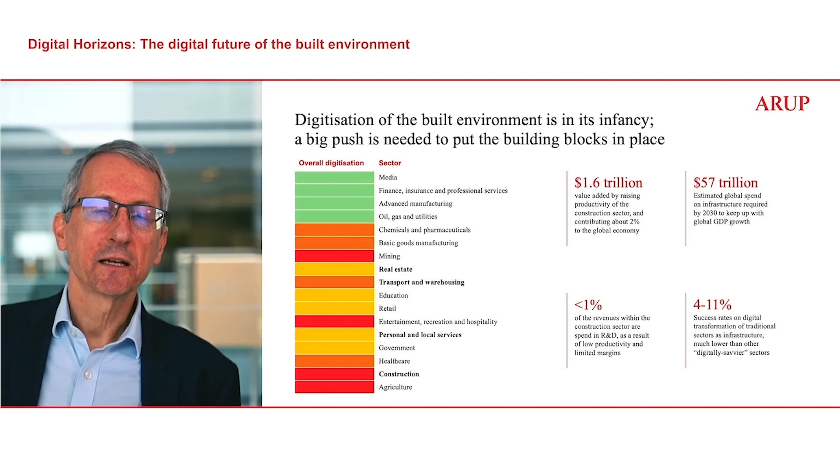Secondly, unlike other well-known technology sectors, particularly consumer technology sectors, where whole new companies or whole new technologies seem to come out of the blue and get implemented very quickly—think of the current debate around something like ChatGPT—in our world, it's different.

We live in a world of deep tech, where our solutions need to be rooted in engineering and science, where research takes time, where it takes time to develop the solutions, scale them, prove them, and make them available and usable in the world of buildings, construction, and infrastructure.

And not only does it take more time, but it also means that the whole sector needs to work much more closely in partnership. Incumbent firms, startups, governments, regulators, financiers, venture capitalists, and of course consumers and clients—all are going to need to work together to pull through the deep tech solutions that our sector needs. And that's going to take longer, so there's no time to lose. We need to get cracking now.

Third, our sector is really rather used to building new things rather than reusing what we've already got. But particularly with the rise of embodied carbon, we're going to need to treasure, preserve, reuse and refurbish what we already have, compared to just thinking about greenfield and new build. Again, digital technologies have a great opportunity here.

So, for example, in refurbishing and reusing existing buildings, a critical task is to understand their structural state. What's their state of repair? How have they deteriorated or otherwise over the 40, 50 or 60 years of their design life? Digital tools, structural modelling, new forms of data, new forms of machine learning allow us to understand that in a way we weren't able to do previously.

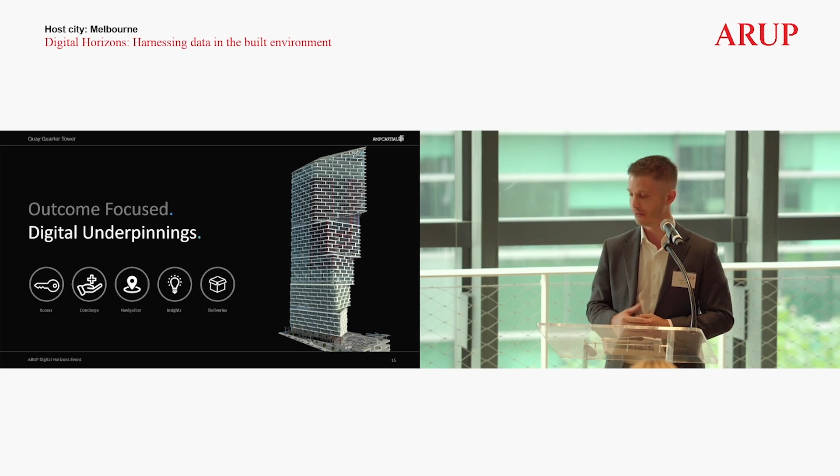Oh, that one. Thank you.

So it all starts with the foundational infrastructure. There are 3 core components that comprise the digital technology stack. One being the operational technologies which run the day-to-day functions of the building, whether that be HVAC controls, access controls, CCTV, energy management, or lighting and load management. In Quay Quarter, we've got about 15 to 30 different subsystems operating in the building.

These subsystems are connected to the integrated communications network, all reliant on open protocol, modern data standards that we can extract data from. This network was put in as the foundational infrastructure to satisfy current use cases and any new use cases that tenants or base building might want to satisfy in future. Having that ability to adapt quickly into the future has been very key for us and our tenant partners.

And that could be certain things around new sensors and really any of those new operational technologies that get introduced in future.

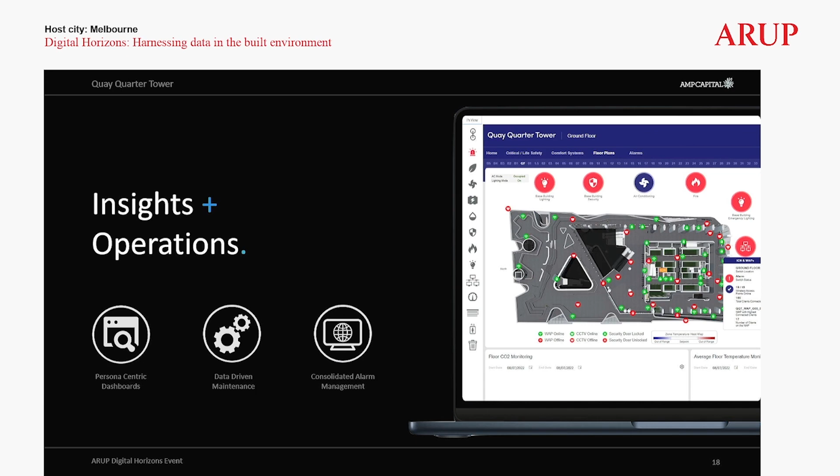A recent one is around building occupancy, making sure that we're able to tell tenants how many staff are in the building, and even from a life safety perspective, who's in the building and what floor they're on.

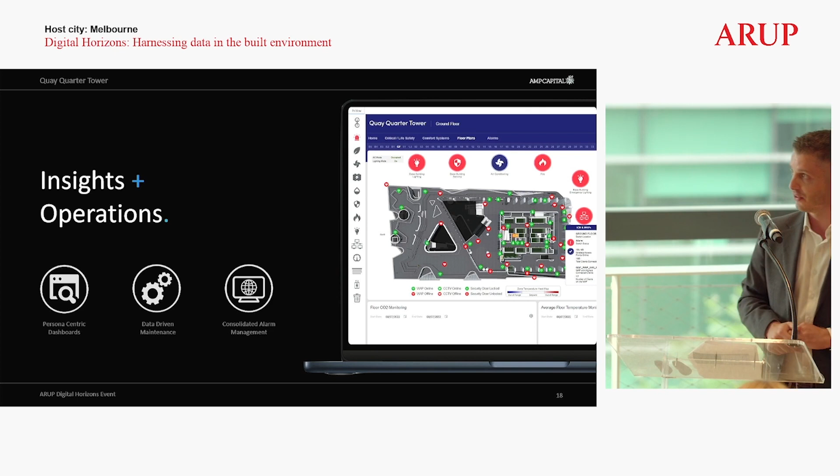Aggregated subsystem views, which you can see on screen, really drawing the user's attention to any critical incidents or issues that might need to be actioned before they traditionally dive into the native subsystems. And indoor environmental quality, making sure we keep on top of that as well. All designed to provide the right amount of information quite quickly and digestible to the masses.

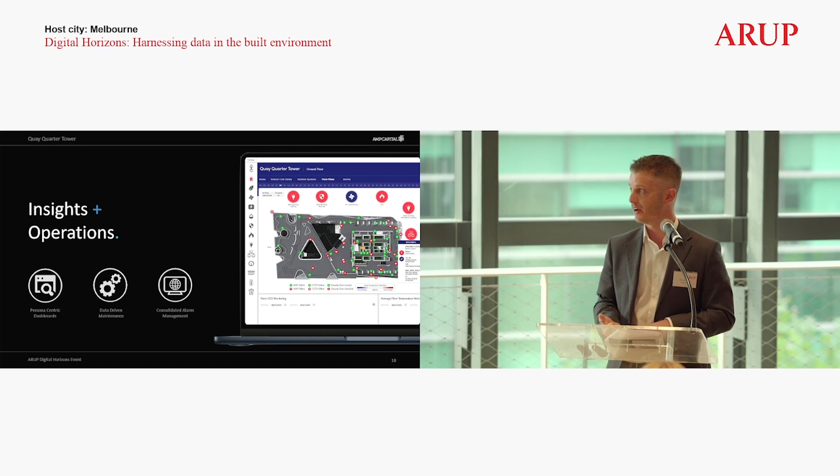So in terms of what's on the horizon, I certainly believe it's putting all that data to work. We've satisfied some of the immediate use cases. I believe there is a whole bunch of opportunity around using that data to optimise energy performance, how we maintain and manage the building, and around asset lifecycle management as well, which is becoming a forefront focus of a lot of our investors.

Decarbonisation, making strategic decisions around some of the lifecycle upgrades that we need to perform over the lifecycle of the building. And I guess just really the role of AI applications. That's such an emerging and fast-paced space, so how we can use the data captured and provide that AI or machine learning overlay to really derive value out of what we've got in the building today.

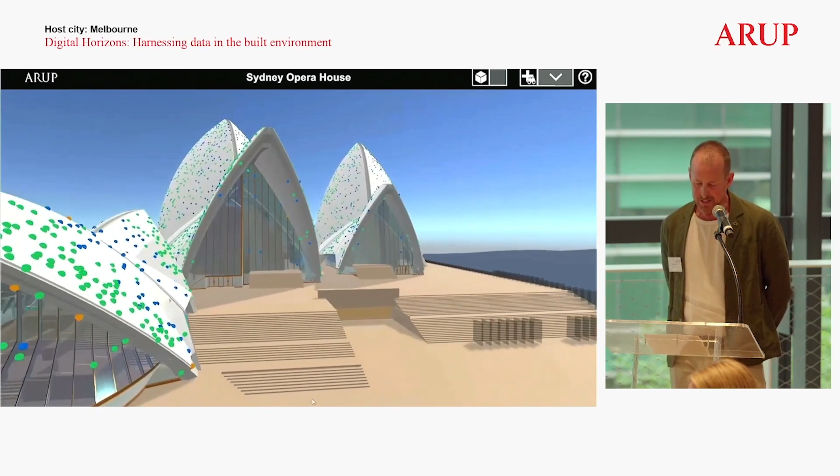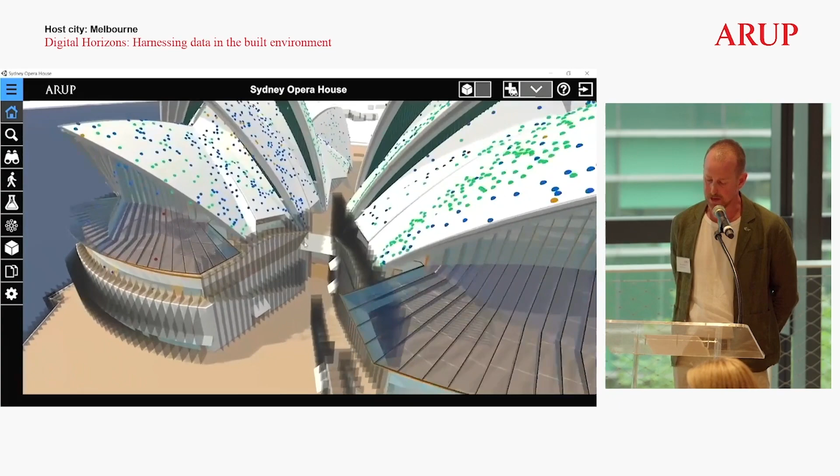As you can see, we can visualize and navigate in 3D, an accurate 3D model, being able to peel away layers of the building, which makes it easy for you to understand and locate points for all parties, particularly with the complex shape and structure that the Opera House is known for.

On paper, it can be a real struggle to get your head around in 2D, but in 3D, when you look at it, it makes it easier to navigate and see what's going on.

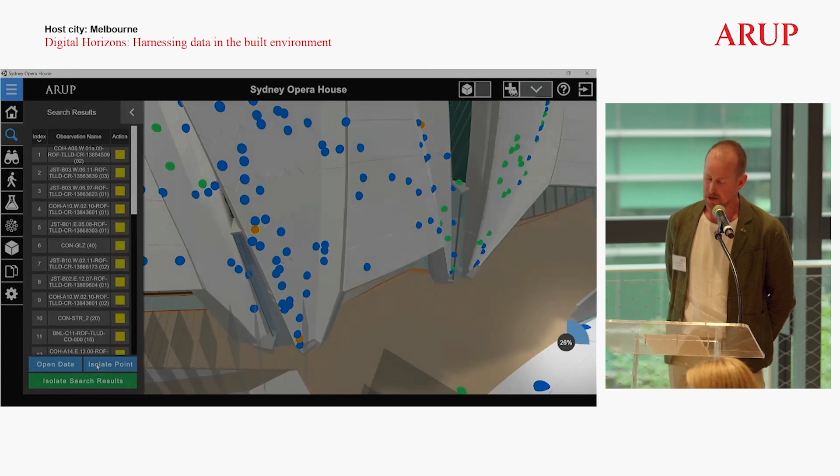The database also has a great search functionality, which enables me to quickly select on items of interest for us to act on and prioritise, without losing detail or feeling overwhelmed.

As such, the resealing of the sealant joints and tile lids or replacing even loose tiles, which we're going to hone in on in a sec.

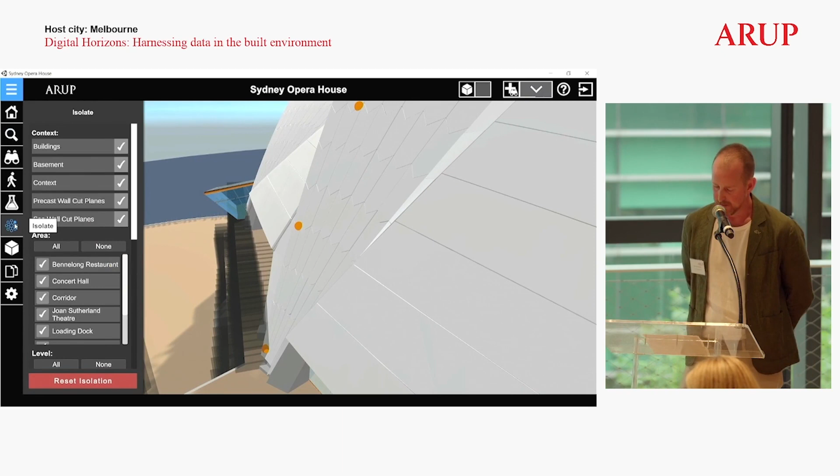Each of these 1,500 data points is detailed with photos, recommended action, and time-stamped, which we can follow up or act upon straight away, or we can just leave it till the next inspection, or we can close it out if we wish.

You can see there's a chipped tile. I will note there was only 35 tiles like this at the last inspection, which out of 1 million tiles is pretty good. Further to closing out any action items, the collection of data is analysed and kept for future reference to look at trends and forecast future maintenance records.

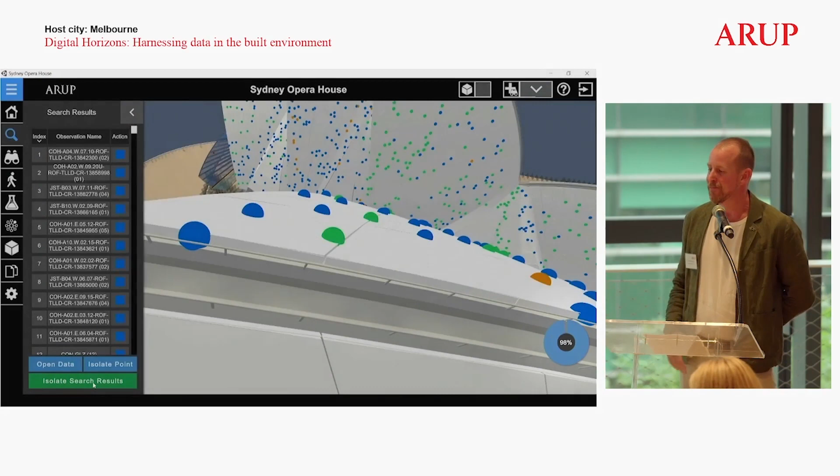The traffic light system that you see was requested by myself to make it really easier to know what I need to action. If you see anything that's red, it shouldn't be red because that's a safety issue and we'd address it straight away. But essentially orange we need to act upon, blue is something that we want to make note of, then we can go back in future and look at that.

In my opinion, the overall value we get from this system is greater understanding and informed decision making to best address issues at hand and for the future of the house.

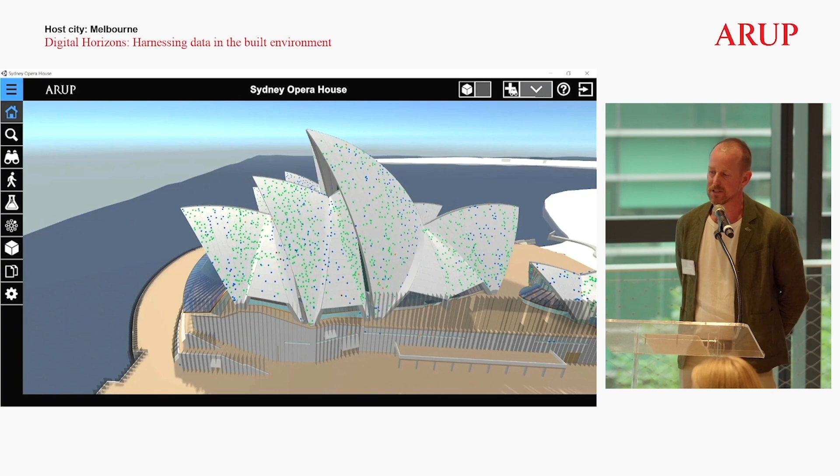So you can see us navigating. At the moment, that's just showing our tiles. We can turn it off and look at precast panels. We can look at the internal structure. We can look at the boardwalks. We can basically search all around the building, so all of those elements. Even things like little chips in glass, we can have a record for, and then go back and either decide to replace that or ignore it. So that's the Arup 3D map.

The next digital enhancement I'd like to talk about, or the digital platform, is MassMotion. What you can see there is a regular event - we put on large music concerts on the forecourt, generally attended by around 7,000 people. The person you see performing there is Paul Kelly, but we've had everyone from Oprah have a stage out there, 5 Seconds of Summer, Crowded House, the German band Kraftwerk - you name it, we get them on that forecourt.

At the Opera House, we really strive to use every part of the building. Real estate's a real prime, and we can't really have any downtime, so making use of the venue is really important to us. Keeping in mind we host around 2,000 events like this and 11 million visitors annually, it's the busiest cultural arts institution in Australia, if not one of the busiest in the world. We support events throughout the year across our 6 major halls, 2 event rooms, 3 restaurants, a massive forecourt, and 3 different public-facing promenades.

We recently engaged Arup to study the evacuation performance of 3 scenarios: a concert on the forecourt, a concert on the Northern Boardwalk, and New Year's Eve. New Year's Eve, as everyone knows, around 17,000 people come down to site. It's one of the biggest events that we have at the house.

Each scenario held a combination of event attendance, management overlay, and evacuation parameters, creating a complex set of factors that is difficult to appreciate in a traditional planning process. We basically wanted to understand the confluence of egress flows as part of the site and manage evacuation.

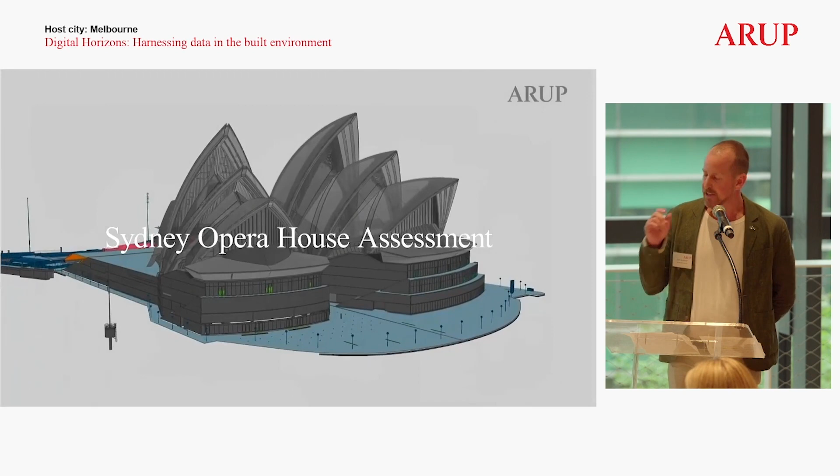The event you're about to see now, a live snapshot, is 6,000 people congregated on the monumental steps and a large stage nestled on the forecourt.

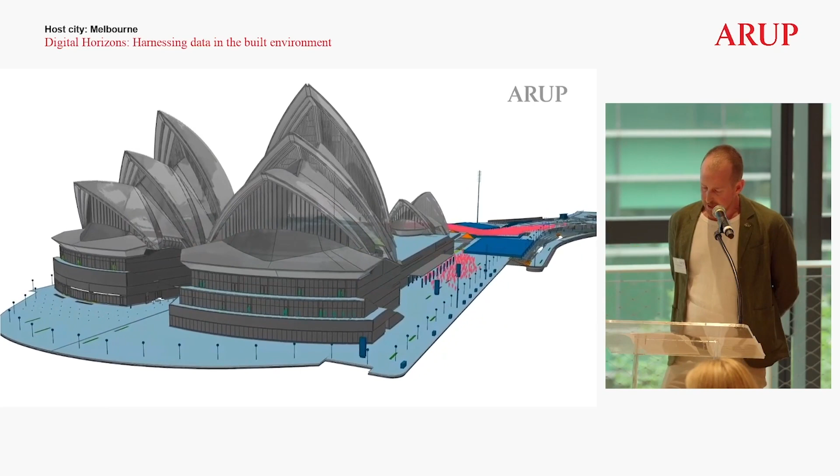Like the 3D map, you can see around 6,000 people nestled on the forecourt and between about 7,100 people in various rooms of the Opera House. There was also around 2,370 people on the lower forecourt. So in this situation, we've got about 16,000 people on site.

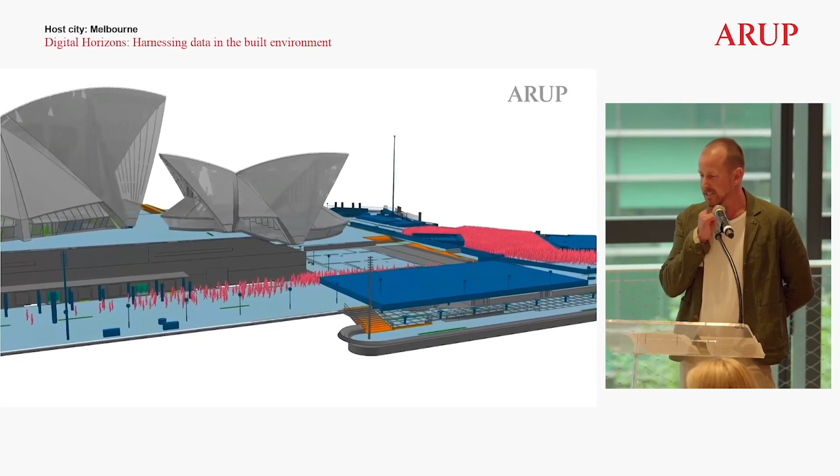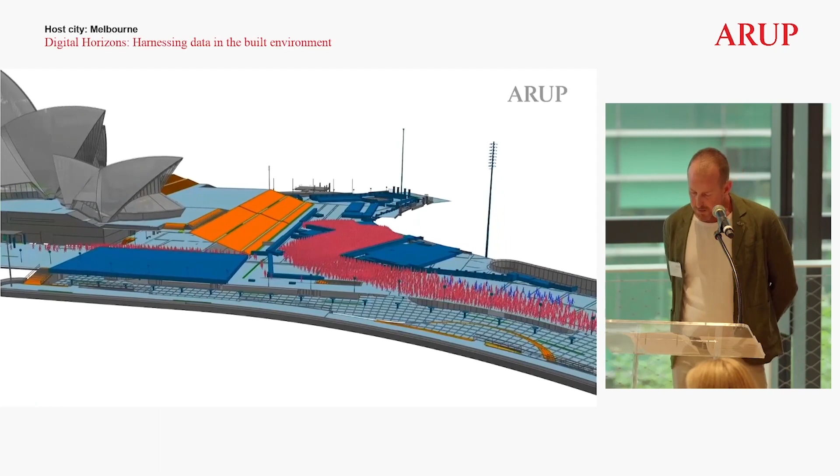Our primary concern with this scenario is the barriers. As you can imagine, when you're putting on an event, you've got barriers separating each of the venues. So what we wanted to do is see how the large stage itself could get people off site safely.

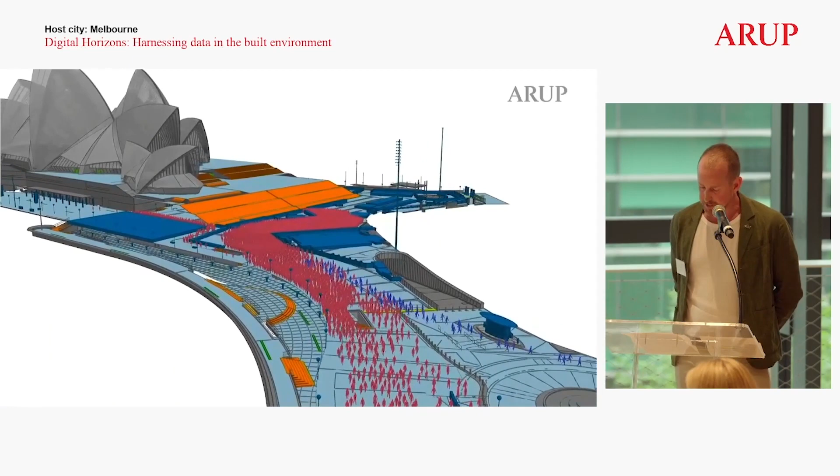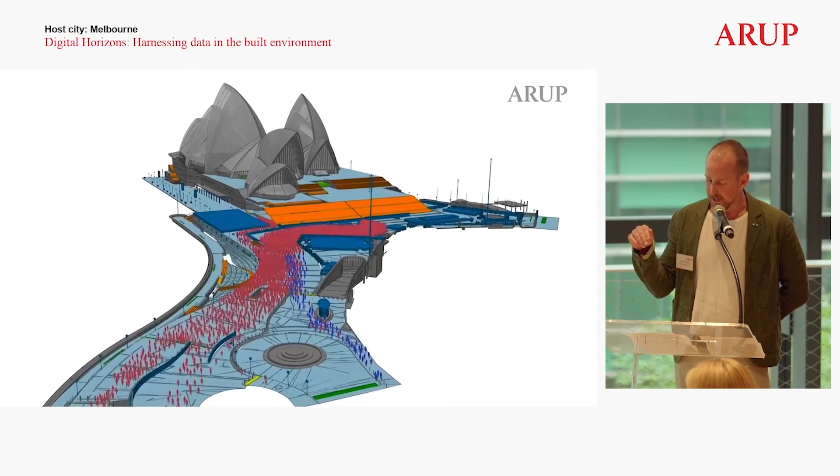What you can see there are the people, we call them agents. They're coloured based on their origin and destination. The pink agents are those attending the large event on the forecourt and on the lower concourse. You'll also see some of the pink agents turn blue as they head to Macquarie Street rather than Circular Quay. The green agents are originating from inside the Opera House itself. We really want to know where the people are coming from and where they're going.

Mixed within the agents, we've also got restricted mobility people, so people that may not move at the same pace as everybody else. We want to get a full spectrum of everybody that's at the house.

You'll also see the green agents arriving behind the scene of the pink agents. This is because of the time it takes to exit from numerous rooms in the Sydney Opera House and out onto the precinct. Some of those agents exit towards the Royal Botanical Gardens - that circular area you can see there.

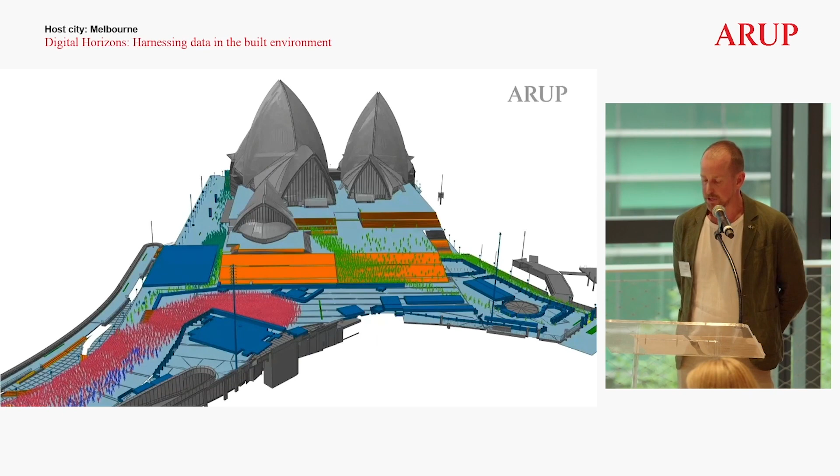In these tests, several indicators helped us understand the performance of the space, the experience, and the people egress, namely in terms of time, density, and delay.

If during these tests we found that we weren't meeting any of the desired outcomes, the levers we may need to improve things include managing flows to a different area, opening and closing crowd control barriers to control flow and relieve congestion, changing the population of a particular space, or reducing demand - reducing the numbers of people visiting those particular areas.

In addition to these performance metrics, the levers and improved performance gave us simulations to engage a platform across the Sydney Opera House departments. So we can sit down with stakeholders, event managers, security, operational staff like myself, and management to best plan for upcoming events.

The study also established a benchmark for crowd management and operations that could be used for conversations with external stakeholders, promoters, hirers, deployed for event staff training, and as a framework for managing similar events across the precinct. It really helps us understand and plan for the years ahead.

For these two apps, where I see them going in the future is I'd love to team this up with the City of Sydney, also the Royal Botanical Gardens, and basically look at a major event like New Year's Eve, for example, where we've got a huge number of people coming down to the precinct, and look at how we can actually control that flow, not just on our site, but also other sites.

And things like with the 3D app, we're looking at drone technology to be able to fly over and look at waterproofing issues, doing things like robotic inspections to supplement our physical inspections, and uploading that directly into the database as well.

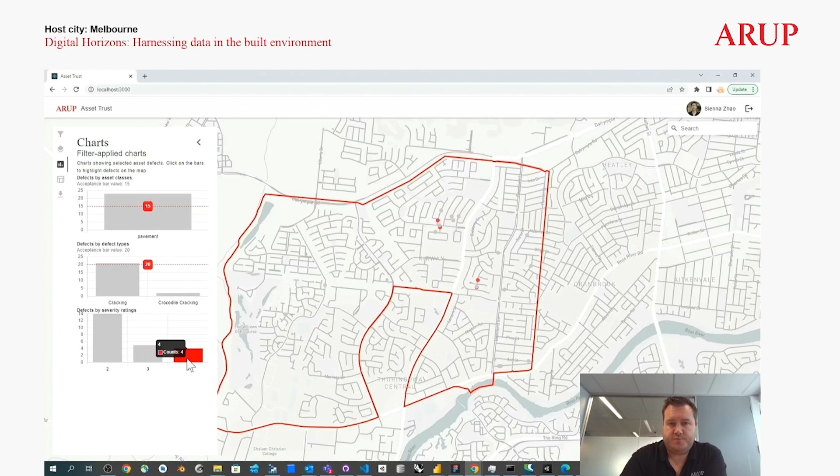With each data point captured, we have the ability to quickly interrogate the data to either verify the defect through a manual visual check, or in rare cases, use this information to add to a list of defects to be inspected by a person via traditional means. Where used as a standalone tool, data in Asset Trust can be easily analyzed and exported by asset managers for use in reporting or generating work orders. Where Asset Trust is deployed to an integrated client environment, our API will serve the data directly to the client's enterprise asset management systems for automated work order generation or financial planning.

So the client that I mentioned, the Chief Technology Officer, these are some of the benefits we have realized for them: 30% reduction in community calls, 15% more defects fixed, twice as many defects captured in a quarter of the time. And for Asset Trust, from the time the data is captured to the time work orders are generated, it takes just 30 minutes, and it's a fully automated system.

We are in the process of extending and scaling this into the rail environment. There's also been a lot of research into our market competition and the available products, so we are looking at scaling this across Arup in the UK as well as the Americas.